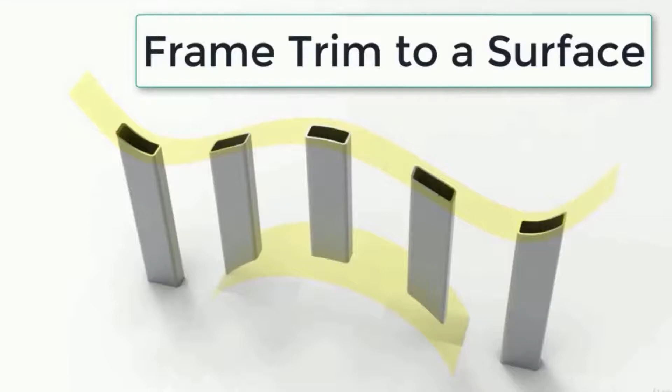Let's start by creating the following sketch, 250 by 400, then coming up to the offset button, identifying this vertical line, distance 100, green check mark, accept, accept, accept. Place those three lines. Then I'll come up to the line command.

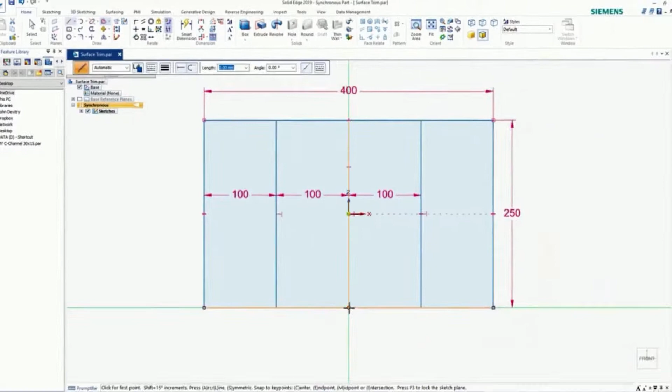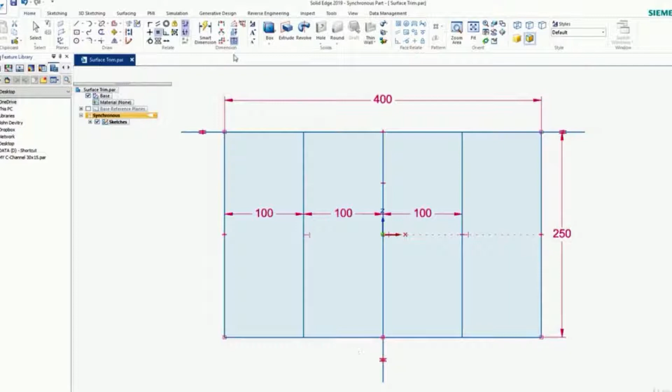I'd like to draw a line at this bottom middle point, and I'd like that to be 55. I'll create another line off this point on the top corner, and another one on the opposite corner. Then I would like this line to be equal to this line, and this line equal to that line.

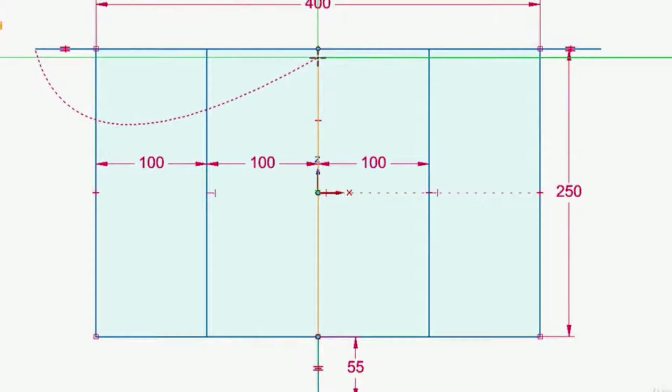I could put a dimension on that to guarantee that's 55. Now I'd like to come up here, curve command, and at the end of this point, start placing a curve. I want this curve to be about this far down. Click right on that line, then come up close to the top of this line. Come across, make sure this aligns fairly closely to the bottom of the other one, then come up to this end point, right mouse click to end.

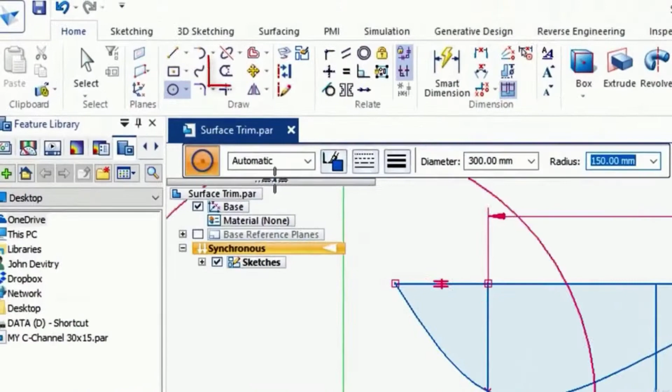I'll come up to the circle command, and from the end of this line, add a circle of 300. Then come up to the trim button and trim off the bottom of that circle. Go ahead and save your model as surface trim.

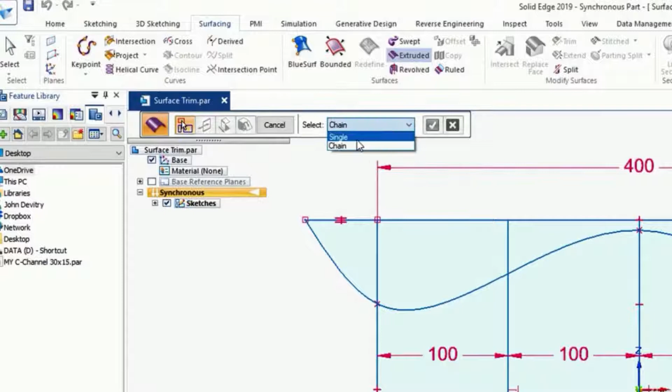Before moving on, I'd like to come up here to surfacing, extrude, and identify this curve. I don't want these extra lines, so I'll turn chain off, go to single, just want that single curve. Green check mark.

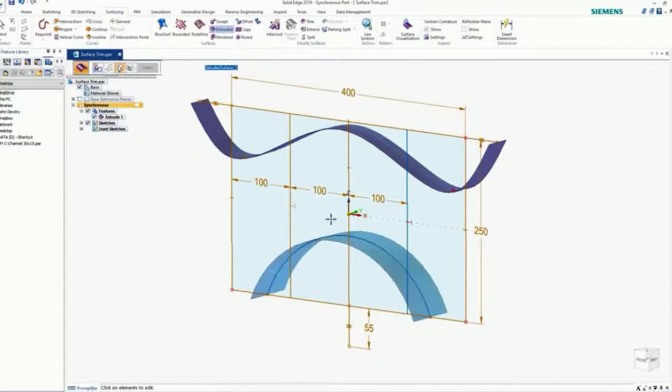I'll spin this around so I can see it from an isometric view, and I'd like to push that out 40. Hit finish. Then I'll come down and identify the arc, green check mark, and push that out 80. Finish. And I'll save my model again.

Come up to the application button, new, assembly of active model. Now I'm not seeing my sketch, so anywhere in this area, right mouse click, show hide all components. I'd like to see sketches and surfaces. Hit OK. Now I can see what I need to work with.

Come up to frame, frame commands, take the defaults, and I'm going to use rectangular tubing, 40 by 20 again. I'll select these 5 lines and green check mark.

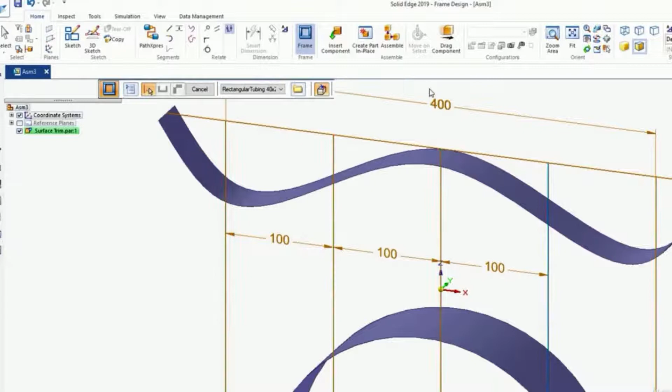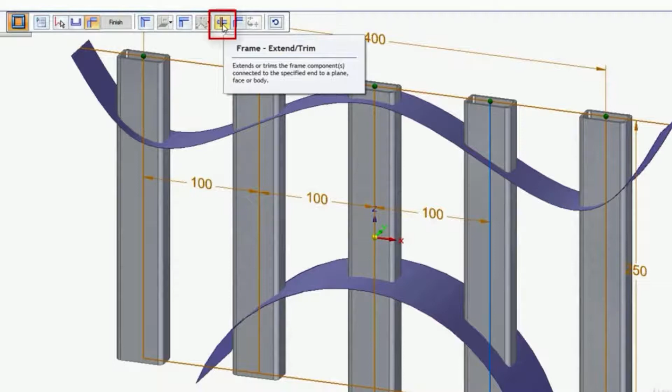Then I could come up to my options, edit end conditions, and on the top here, I'm going to identify these 5 red dots, because this is what I'd like to trim back. Green check mark. Come over to extend trim. And the surface I'd like to trim this back to, you can read it in the prompt bar.

Click on a plane, face or body, so you can use a solid also to trim this back. So I'll come up to this surface and identify the surface. And I see it didn't trim it the way I wanted on this center one. I'm not sure why that is. It's because this is a little longer.

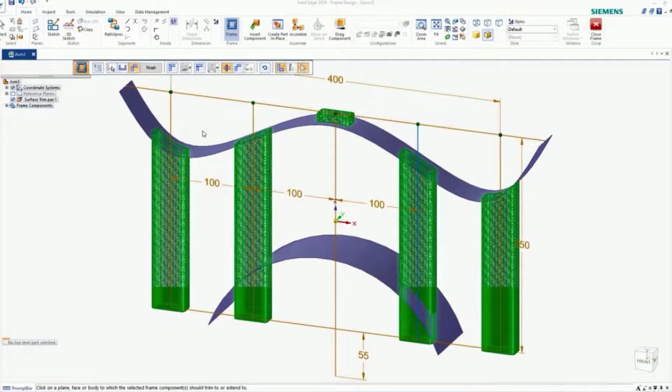So I'm going to go back, hit escape, and undo. Just remember, not everything works the first time. Come back to the frame commands. OK, and I'll try this again.

Click on my 5 vertical lines. Green check mark. Come up to my frame, edit end conditions, and this time I'll pick the first 2 here, highlight those as green, but then I'll jump to the bottom down here and pick this one instead of the top one. Then I'll come back over and pick these other 2 up.

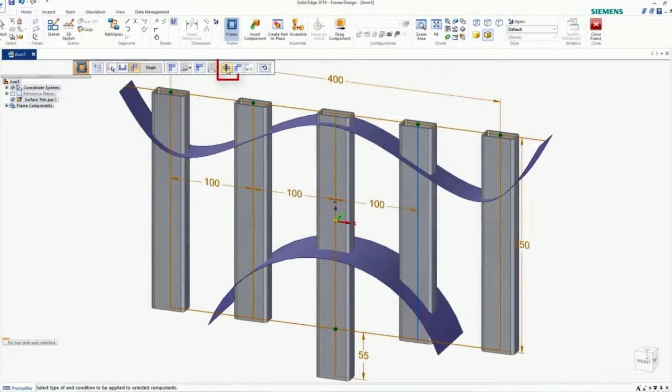Green check mark, then I'll select extend trim, and I'd like to trim it back to this surface right here. So identify the surface, and now that did what I wanted. I'll hit finish. And then let's cancel out of where I am, or hit escape.

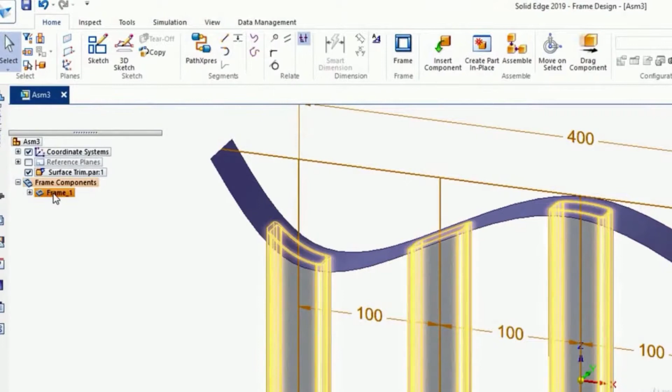Then I'd like to come back to my frame components over here, and identify my frames from here. So I'm out of the command, select frame, and I'd like to edit this again. Edit end conditions, hit OK, edit end conditions, and this time I'd like these 3. This one, I'm going to pick the bottom one here, I'm guessing that's right, and this one.

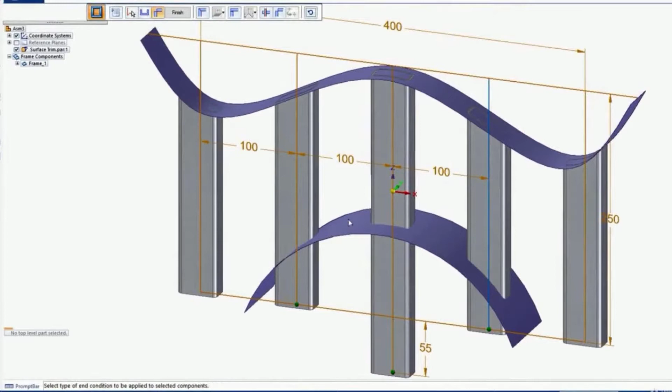Green check mark, and I'd like to trim back to this face. Identify the extend trim, and identify the face. It trims back to the selected surface. I'll hit Escape, Clear, and turn off my part model.

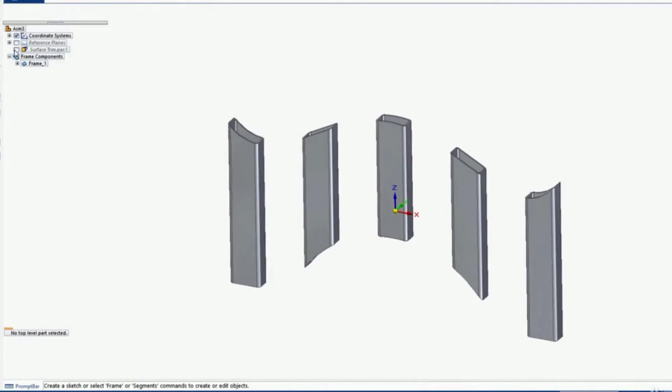There's my trimmed pieces. Now I'm going to turn my part on again, right mouse click, Show Hide Components. I'd like to hide all the sketches. Hit Apply, just so I see those surfaces.